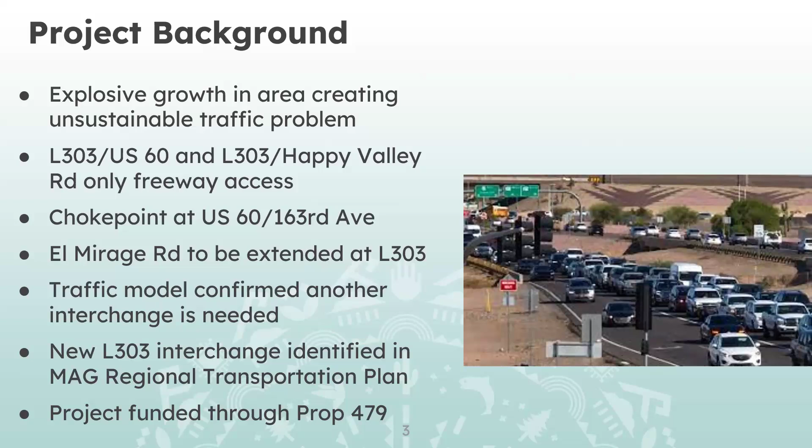In 2024, ADOT initiated a project assessment, the Loop 303 US 60 to El Mirage Road Traffic Interchange Alternative Study, to identify the best location for a new Loop 303 interchange. The PA was completed in June of 2025 and documents the study team's full analysis and recommended interchange location.

A project assessment is an early planning document for a project. This project is not receiving federal funding, so a federal NEPA study, an environmental impact statement, or environmental assessment was not required. The purpose of the project assessment was to evaluate possible interchange locations and to determine which one would perform best. While the PA included preliminary design concepts, it did not determine the final design of the interchange.

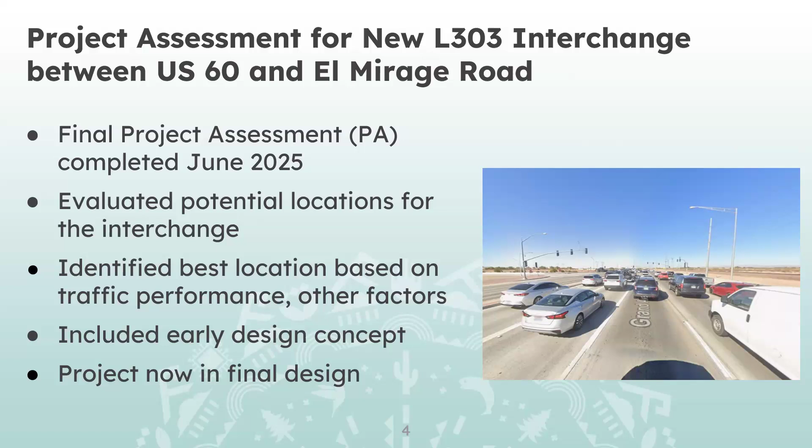We have begun the final design of the interchange now, and design details, including the exact ramp configuration, visual appearance, height of structures, and noise wall locations will be refined and determined during this phase.

The study evaluated 4 potential locations for a new Loop 303 interchange between US 60 and El Mirage Road. As shown on the map, those 4 locations from west to east were 155th Avenue, 151st Avenue, 147th Avenue, and Litchfield Road. A 5th option, the no-build alternative, was also considered.

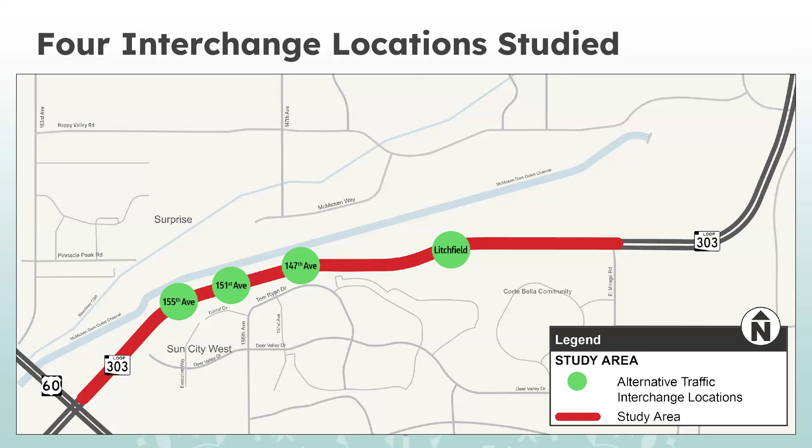That alternative would have left the freeway as it currently is. The study determined that the no-build alternative would not address any of the identified traffic needs and that congestion would continue to worsen.

To determine which location was best, the study team evaluated each of the interchange locations based on 6 factors. The first criteria was regional mobility, which evaluated how much each alternative would relieve congestion on US 60 and on 163rd and the surrounding local streets.

The second evaluation criteria was traffic operations, which evaluated how smoothly traffic would flow at the new interchange and whether it could handle emergency situations.

The third criteria was environmental, which evaluated potential visual and noise impacts to nearby homes and the golf course, as well as the effects on flood control facilities.

The fourth criteria was engineering feasibility, which evaluated the potential capacity or the potential complexity of each location's design concept, and whether it was compatible with future freeway improvements and the existing Loop 303 US 60 interchange.

The 5th criteria was social and economic impact, which evaluated whether the alternative opened access to future development areas and how many residences would be affected.

The sixth criteria was cost to design and construct the interchange. And lastly, public input on the 4 locations being considered was another key factor considered by the study team before selecting the interchange location.

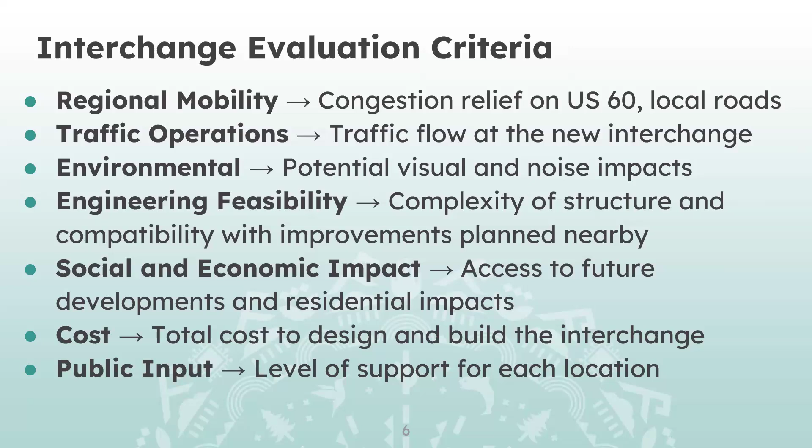Thanks, Tricia. Because public feedback was a key part of the study evaluation process, ADOT provided the following opportunities for the community to provide input on the alternatives.

The first was a comprehensive online survey. We also provided an opportunity to comment via email, phone, or mail for those who weren't able to take the survey or preferred to provide feedback that way.

And lastly, ADOT gave a presentation on the alternatives at a public meeting hosted by the Maricopa Association of Governments in March 2025. We took public comments at the meeting while also pointing people to the online survey to provide feedback.

ADOT conducted the online survey in February 2025 to get input on the interchange alternatives. The survey was available for 1 month. It showed all 4 potential locations, a graphic of each alternative design concept, as well as considerations for each alternative, which included how well it addressed traffic needs and other considerations such as anticipated impacts.

This graphic shows the considerations for the 155th Avenue interchange location. For each of the 4 alternatives, we asked 3 questions: How much do you support this location on a scale of 1 to 5? What do you like about this alternative, and what do you dislike about this alternative?

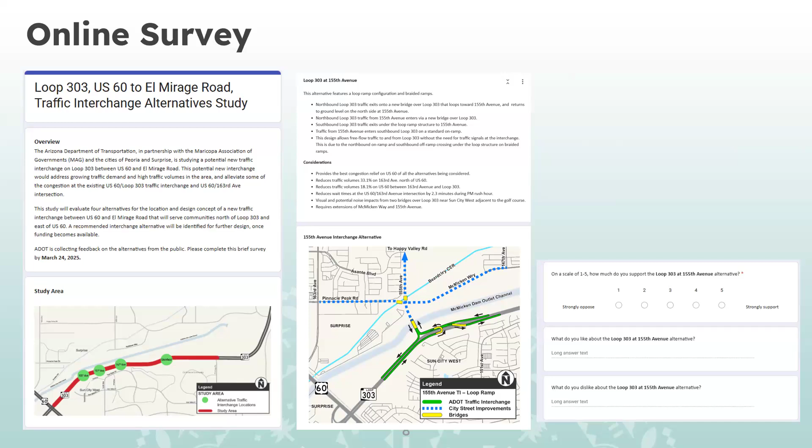ADOT has been asked what public notification was done to inform the community about opportunities for input on the study. ADOT used multiple outreach methods to communicate about the study and opportunities to provide input on the alternatives through the online survey and MAG public meeting.

We posted detailed information about the study and alternatives on our project website with a link to the survey. We sent email notices to approximately 18,500 subscribers of ADOT's Loop 303 and US 60 Grand Avenue subscriber lists. We sent direct email notices to staff at PORA and other HOAs located near the project area for them to share with residents. We posted on ADOT's Nextdoor, X, and Instagram accounts.

We issued a news release that was picked up by several local media outlets, and at the public meeting where we presented the alternatives, we advised how to provide comments via the survey and other methods.

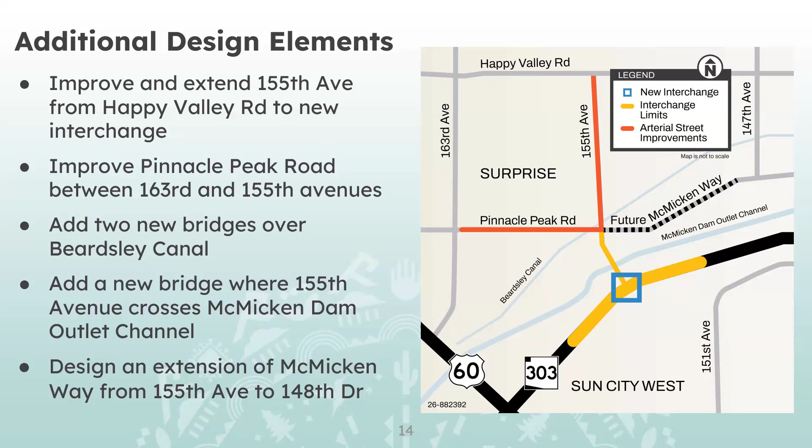Another concern we've heard from the Sun City West community is about freeway noise. ADOT is required by federal standards to conduct a noise analysis on every new interchange project. Noise analysis is always done during final design, because design must be complete enough to model accurately. This is why we don't have the results to share here today.

We conduct the noise analysis for properties within 500 to 900 feet of the freeway. We will present noise analysis findings and recommendations at the next public meeting in early 2027, once we have completed the 60% design. The noise analysis will also be shared on the website for public review.

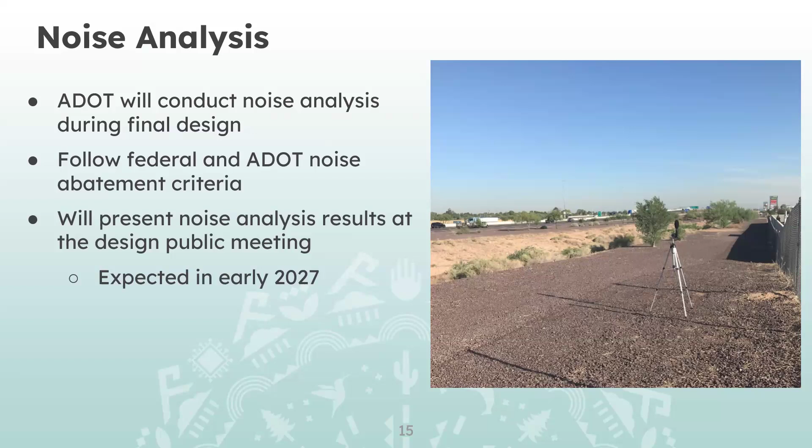A couple other projects in the area: one of the evaluation criteria considered during the Loop 303 interchange alternative study was compatibility with two other projects in the area, one of them being the ultimate improvements planned at the US 60 Loop 303 interchange. In 2022, ADOT completed a feasibility study to identify the ultimate recommended US 60 Loop 303 interchange reconfiguration. The reconfiguration included a US 60 overpass at 163rd Avenue and Loop 303 on and off ramps over the railroad tracks.

Near-term improvements at the interchange were completed in February 2026 to mitigate some of the traffic congestion. The improvements included additional travel lanes, dedicated turn lanes, restriping, new signs, traffic signal timing adjustments, and railroad coordination. The ultimate US 60 Loop 303 interchange project is included in MAG's Regional Strategic Infrastructure Investment Plan and is funded by Prop 479. Design is expected to begin in 2030, with construction programmed for 2033.

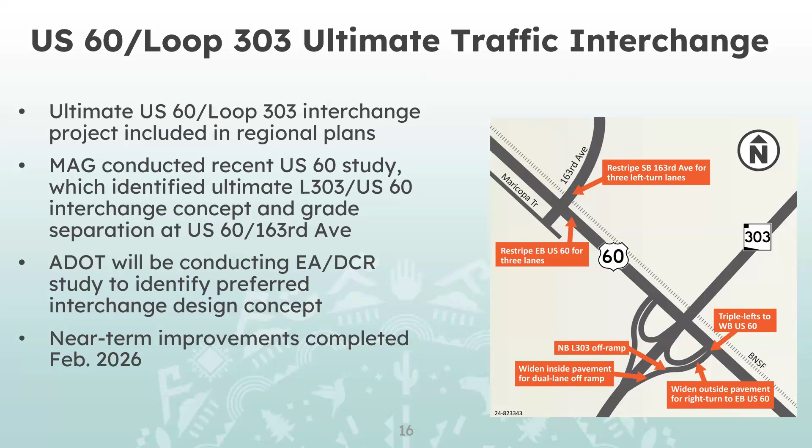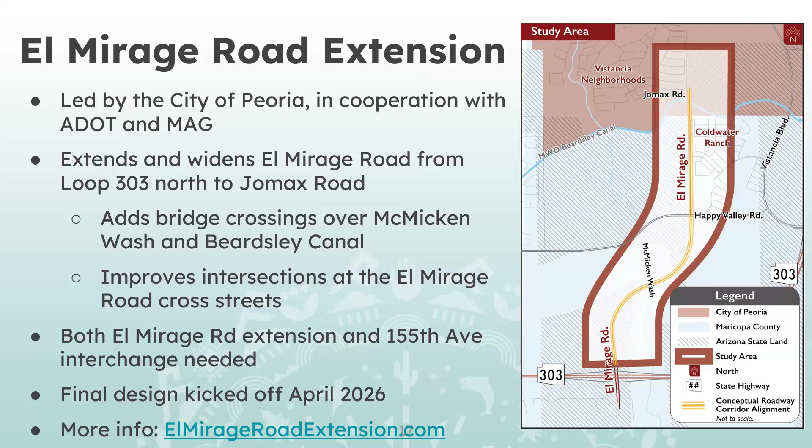However, the two study and design teams have coordinated closely to make sure their traffic forecasts are consistent. Based on the Maricopa Association of Governments regional traffic model, continued growth in the area has created a need for both the 155th Avenue interchange and the El Mirage Road extension. Building both projects will offer greater traffic benefits than building either one alone. If you would like more information on the El Mirage Road extension project, you can visit elmirageroadextension.com.

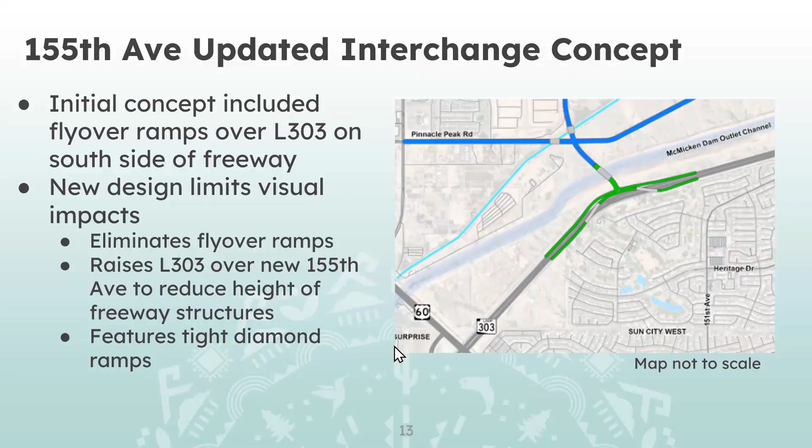So we will, just as a reminder, when we have the public meeting, when we have this meeting with PORA, we will communicate that out through our Gov delivery notice. Again, not the public meeting, this next meeting with PORA, we'll communicate that out through the community, and anybody on our list we'll make sure we get that out. And then when we go to have the public meeting, we will notify people through our email Gov delivery list, as well as mail within 1 mile of the interchange location, as well as to PORA, as well as to news media and local jurisdictions and Nextdoor, different methods.

So just making sure that we want to get you on our list. If you're not on this, I'll circulate something and we can have people sign up, or you can sign up on your own. We want to make sure you... Cindy has access to all of them. Oh, she does? Yeah. Oh, and so you're gonna share that with us? Okay, thank you, appreciate that.

The next meeting in May is the third Wednesday of the month, from 11:30 to 1. And the reason I'm bringing that up is it's all the way to Phoenix. If we had a bus, we could get there, but you have to drive.

It's at the MAG offices in downtown Phoenix. The reason I'm telling you about this meeting is they're going to go over the long range planning, and then also in May and June with this specific information. The meeting is 11:30 to 1. If you're part of PORA, we send out a weekly newsletter that's going to be chock full of information regarding this interchange.